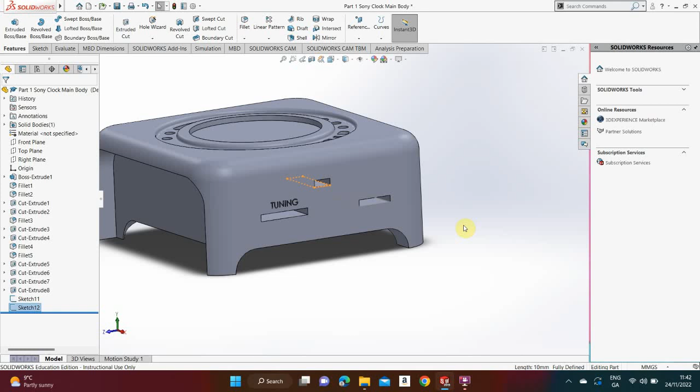Hi everyone. In this video, we're going to make the last two parts for this clock, which are the dials and the switch, and then the front face where the digits go. You don't need to open this up, I just have it opened to show. I'm just going to go to a new part file, new part, okay.

We're going to go to front plane, click sketch. These are very easy, go to circle, and I'm going to draw a circle there. On smart dimension, that circle is a total of 30.

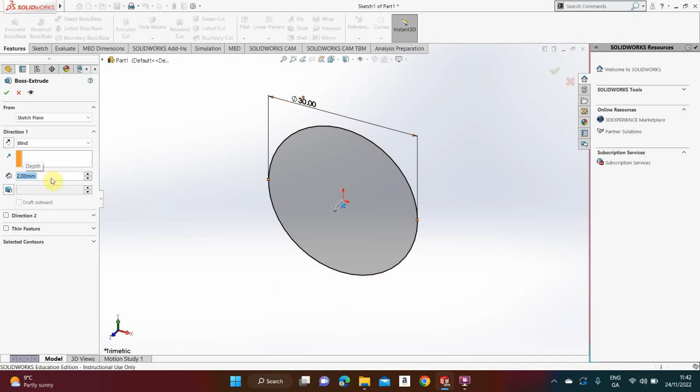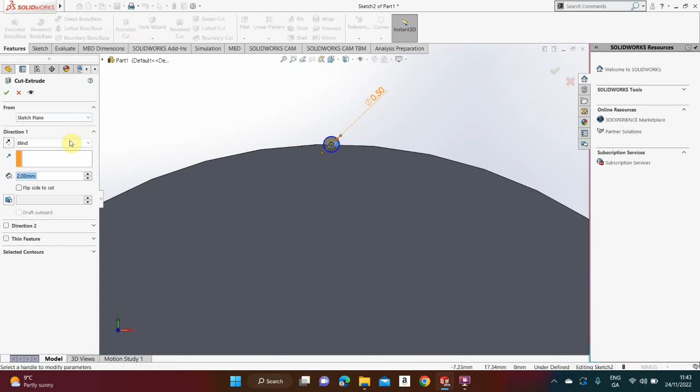Then go to features, extrude boss base, and we're going to extrude that a total height of 2. Need to make sure that says 2. That's done. Then right click, sketch, space bar, normal to. Just going to circle again, and up here at the top I'm going to draw a small circle. On smart dimension, that circle is a total of 0.5.

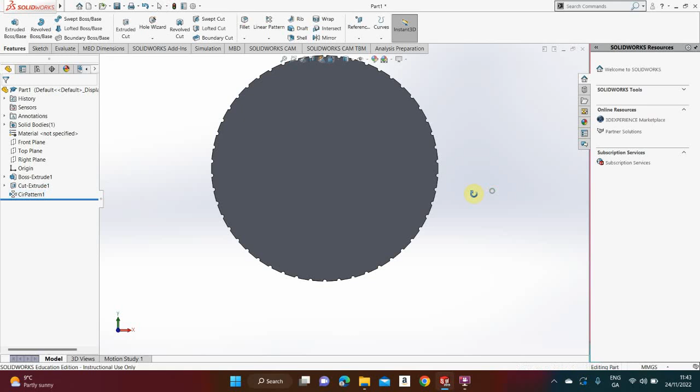I go features, extruded cut, change it from blind to through all, click the green tick. I then click underneath that, go to circular pattern. The area I want to follow is the big circle, so I click this one. What I want to pattern, I click this here, click the little arrow, go to cut. When you zoom back you should see it starting to happen. The amount I want will be 50, so change from 3 to 50, and click the green tick. That gives the impression of the dial on the outside.

File, save as, and we're going to call that Sony dial 30 millimeters. Click save. Then I'm going to go to file, new part, okay.

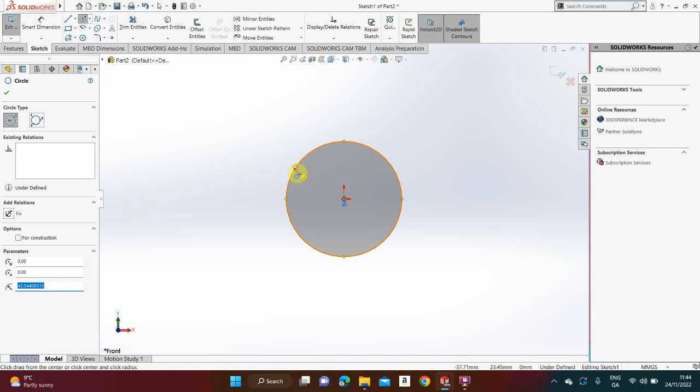Again, the front plane, we'll go to sketch. Now this time we're going to draw a circle that we're going to smart dimension as being 20. Features, extrude boss base, we're going to extrude it again, that's 2 millimeters. Click the green tick, click it again.

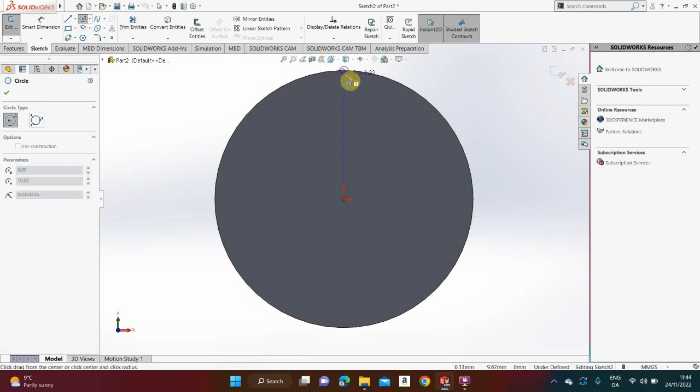Right click anywhere on this face, go to sketch, hit the space bar, normal to. Sketch, and again a little small circle up here at the very top. Smart dimension, the dash is 0.5. Features, extruded cut, change it from blind, through all, click the green tick.

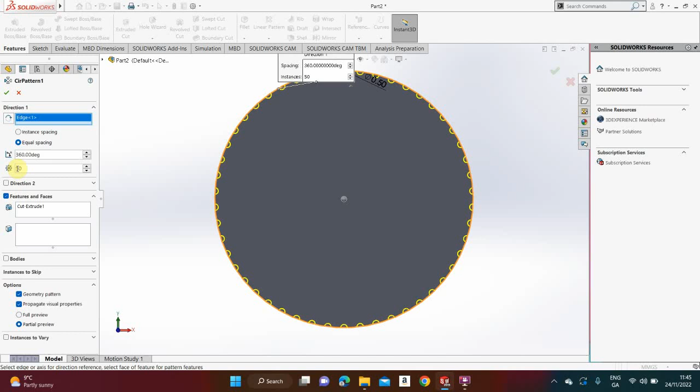Instead of linear pattern, click the drop down arrow, go to circular pattern. The top box, click it, then click here. It's already updated from the last time, 50 is the correct amount. The thing I want to do is cut extrude. But if that was empty, let's say there was nothing there, I would click the little option here, go to cut extrude and make sure it's 50. Click the green tick. That makes up the 20 mm dial.

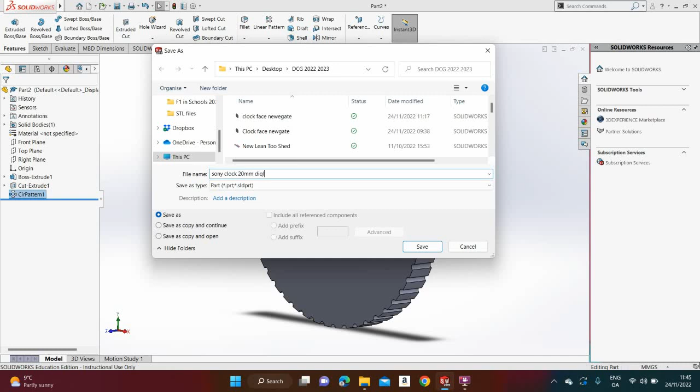So file, save as, and we're going to call that Sony clock 20 mm dial. Just make sure you're saving into the correct folder. Then we go file, new part, okay. And then we're going to make a little switch.

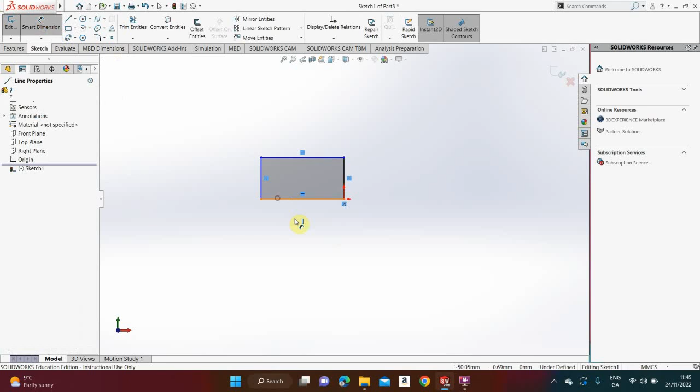We'll go to front plane here. I'm going to draw a corner rectangle from the origin on out. We smart dimension that is a total width of 10, total height of 2. Sorry, not 2, it should be 4, that's my mistake, change that 2 to 4. We go features, extrude boss base, going to extrude that a total distance of 5.

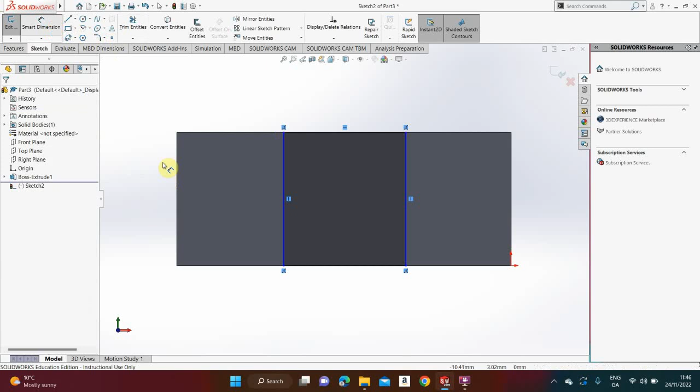Right click, sketch, space bar, normal to. Again we go to sketch, and we go to line, and we just draw a line from here, down, across, up, over. Smart dimension that the distance from here to here is a total of 3. Smart dimension that from here to here is a total of 3. I then go features, extrude boss base, and I'm going to extrude that another 2.

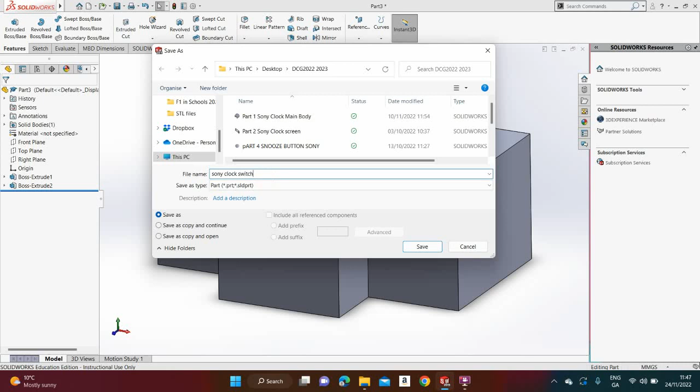That's the switch. I go file, save as, and we call that Sony clock switch. Nice and simple. Click save.

Then the last thing we need to do now is to make the digital face for the part. So in the next section of the video, I'm just going to be getting a measurement from an existing part, which you don't need to participate in. So there'll be no talking for the next part of the video.

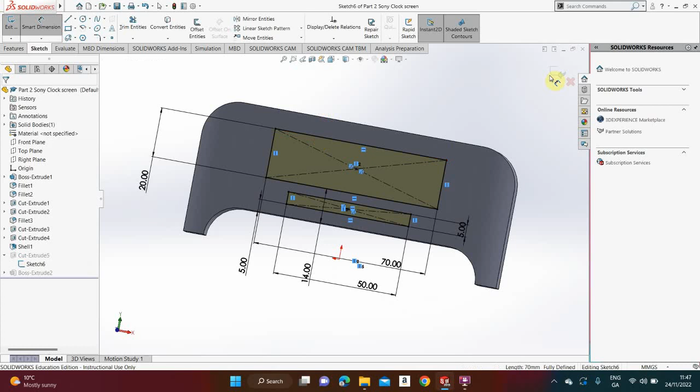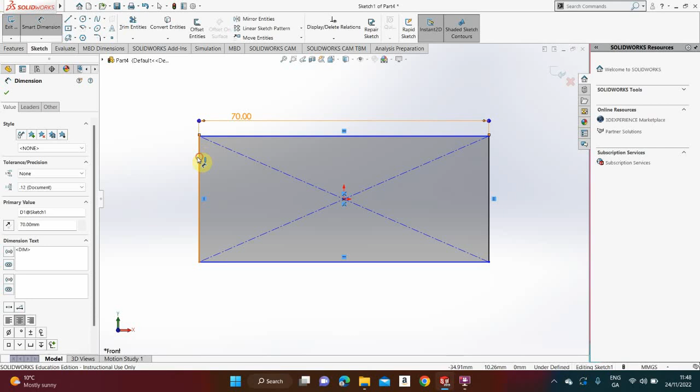Okay, so we can start now again. I go to New, I go to Part, I click OK. I go to Front Plane, I click Sketch. I click the drop down arrow here, I click Center Rectangle, and we are going to draw a rectangle that is 70 by 20. Features, extrude boss base, and the total thickness we're going to extrude that there will be 1.

Onto this then we're going to put the digital digits. So I'm just going to right click on this place, click Sketch, spacebar, normal to. I go to Sketch, I click Line, I click For Construction. I'm just going to draw a line from this side to this side, making sure it's a construction line. I'm going to smart dimension that line to the bottom of that rectangle as a total of 2.

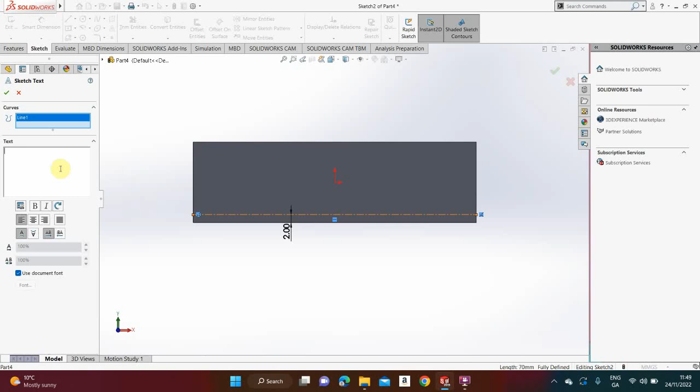I then go to Text, and I'm going to click that line, and we're going to just type in 12.00. We're going to click Centerize. I'm going to untick Use Document Font. I'm going to go to Font, and we're going to use a height of 6. We can also make it italic, and we click OK.

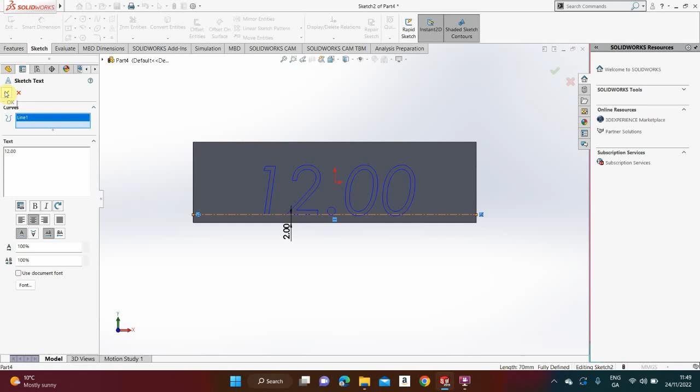6 is a bit small still, so we're back to Font. We might change from 6 to 12. There we go, click the green tick. Now there's a small mistake there, it shouldn't be dot, it should be colon, so I'm just going to put in the 2 dots there. Now that's better, click the green tick.

Features, extrude boss base. And that's going to be very small, that's only going to be 0.001 of an extrusion. Click the green tick once, click it again. And that is the clock time.

So File, Save As, Sony clock, time face. And that's the final part. So in the next video, we'll be doing the assembly of the Sony clock. Make sure you have all the parts made before you watch the assembly video, which is going to be put up fairly soon. Okay, thanks very much.